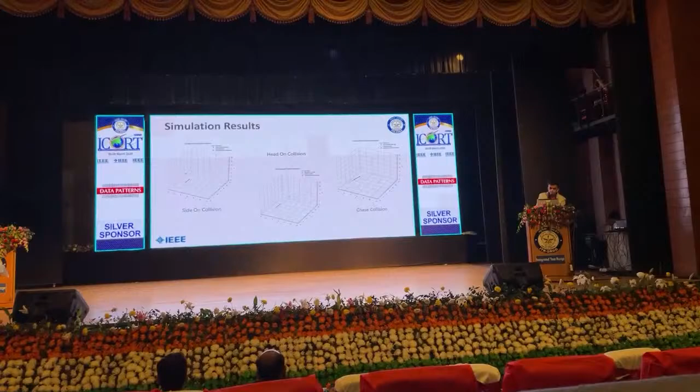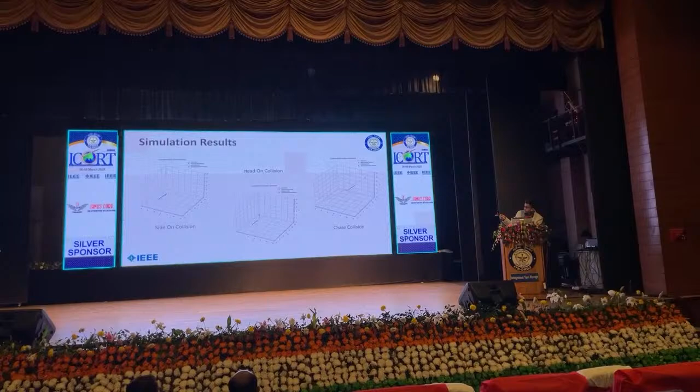So here we can see the simulation results which we have conducted for different scenarios of collision. The first one is side-on collision, where the UAV is changing its course and going downwards and then again resuming its path over there.

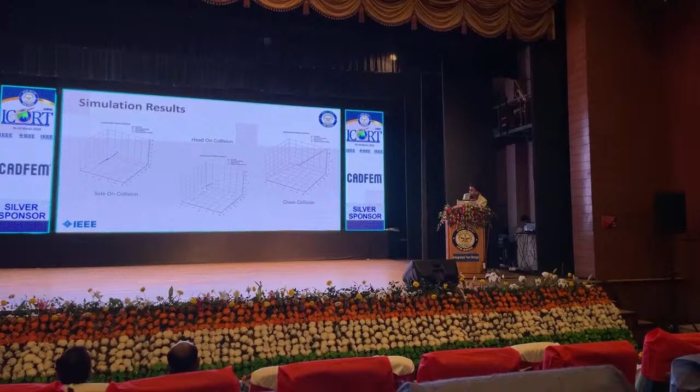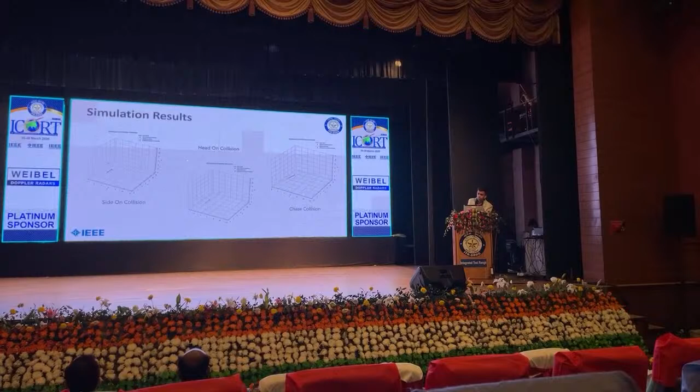Similarly, for the head-on collision, it moves in a perpendicular direction, and in the chasing collision, where the obstacle is chasing the UAV from behind, it diverts its course to a random direction perpendicular to its path and then reroutes itself to the original path.

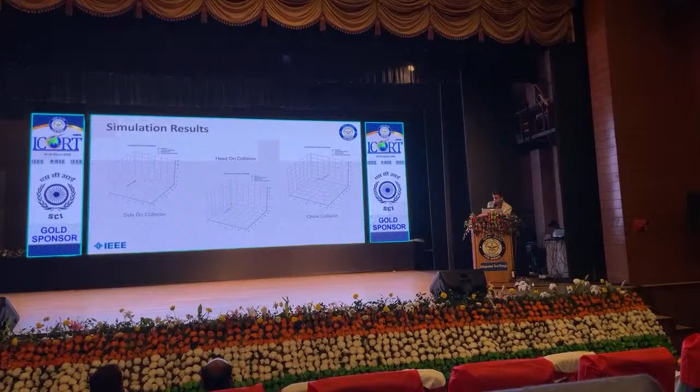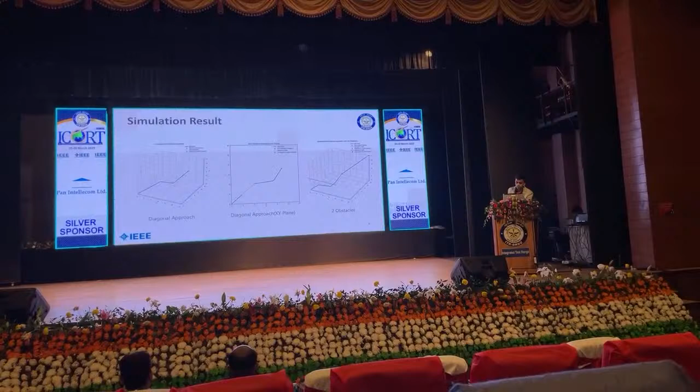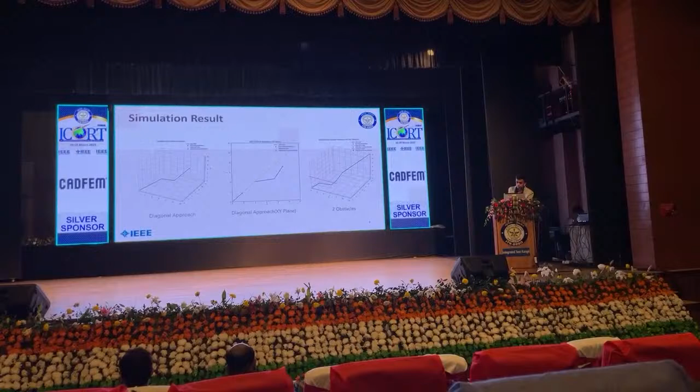So these are some other scenarios which we have tested for the same algorithm. We have also tested two obstacles at a time which are moving closely together. So it successfully avoids both the obstacles and then goes back to its desired path.

So in conclusion, we were able to create an algorithm which successfully tackles the moving obstacles in the environment and reroutes its path to avoid those obstacles and then comes back to the original path.

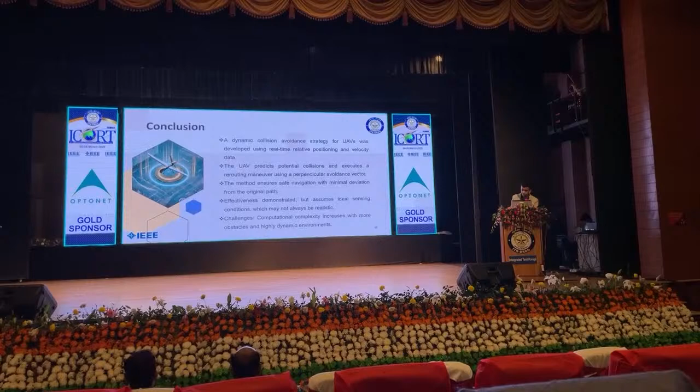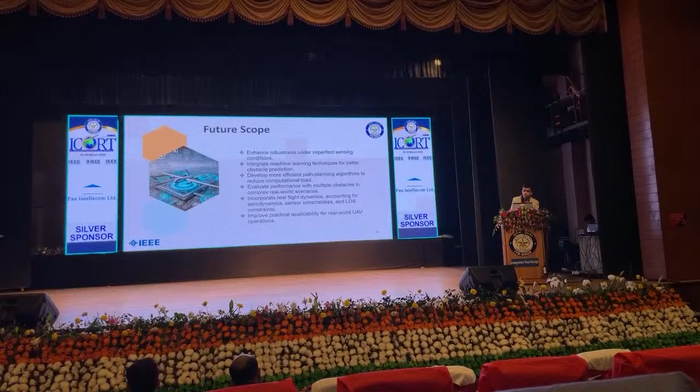So in future, we are planning to use this algorithm for more obstacles, and we plan to integrate newer technologies like machine learning in predicting the course of obstacles, so we have a better chance of predicting its motion and avoiding the obstacle further.